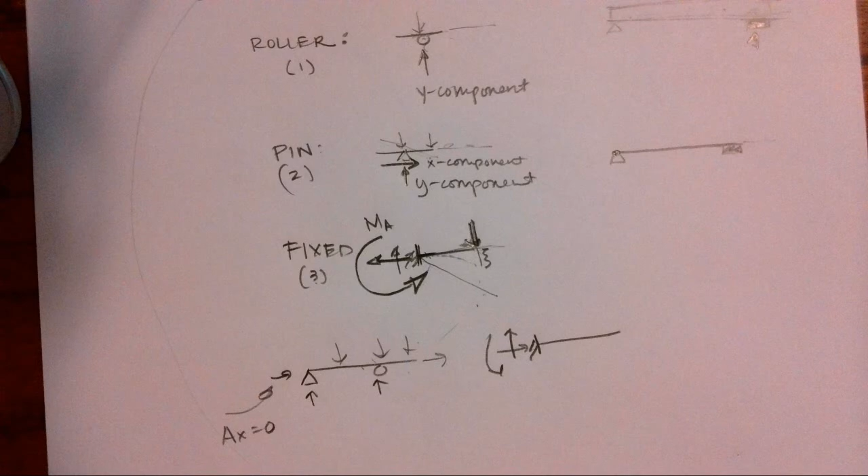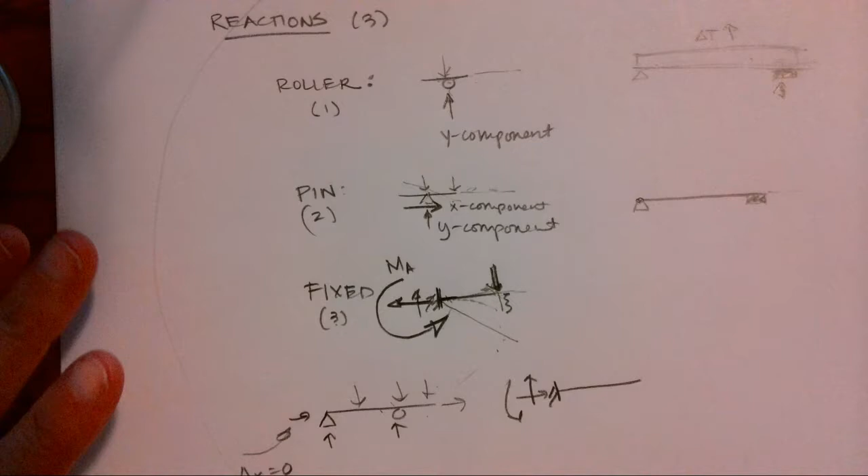We just covered the basic definition of our three reactions that we'll be working with in strengths: roller, pin, fixed. If you didn't watch that video and you don't remember any of this, I suggest you watch it. You have to understand this.

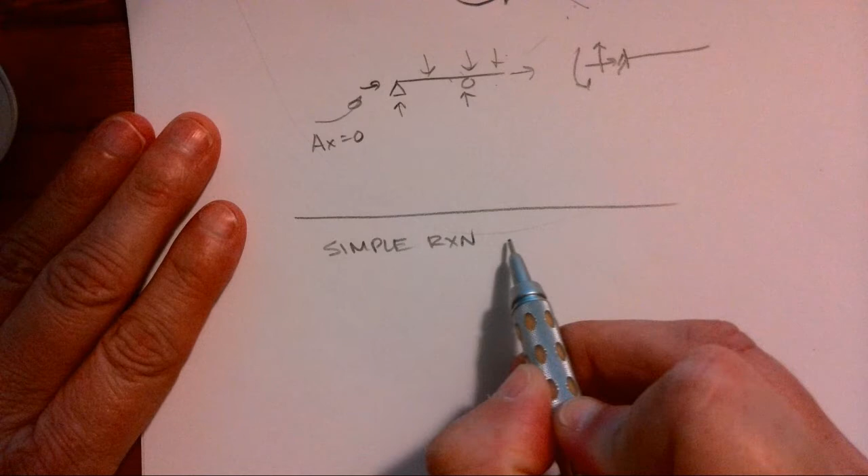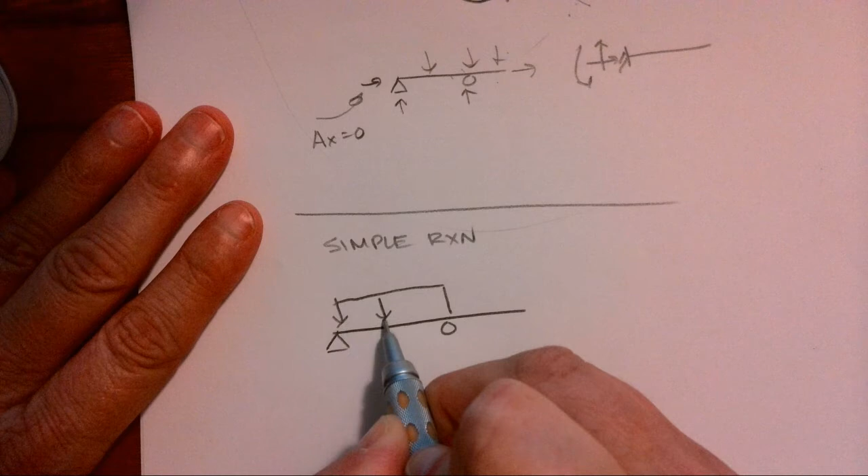So if we are going to look at a simple reaction from a simply supported beam or a simple cantilever, then let's just kind of make something up here and talk about the three types of loading. So we could have a uniform load, okay? And remember, it could also be linear, a function of x. We could have a point load, and we could have an applied moment, okay?

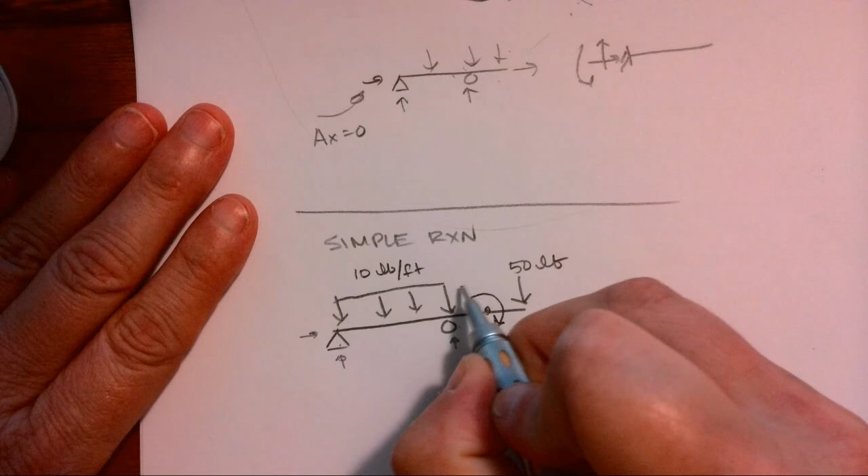So I have a pin and a roller. A pin, I could have, remember, an X and Y. We prevent translation. A roller, perpendicular. We're preventing translation. So let's just call this 10 pounds per foot. Let's call this 50 pounds. And let's call this 5 pound-feet. That's my moment that's applied.

And let's look at this. This is 10 feet. And this is 5 feet. Okay, so this might be what's given in the book. So the first step always is to draw a free body diagram.

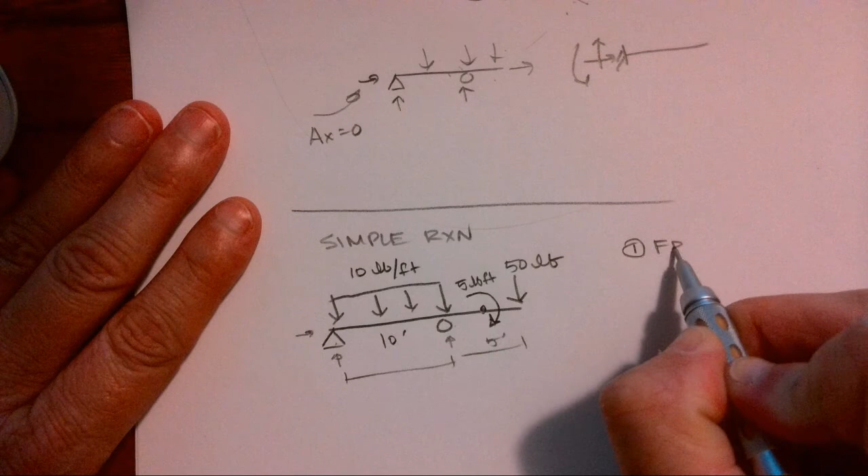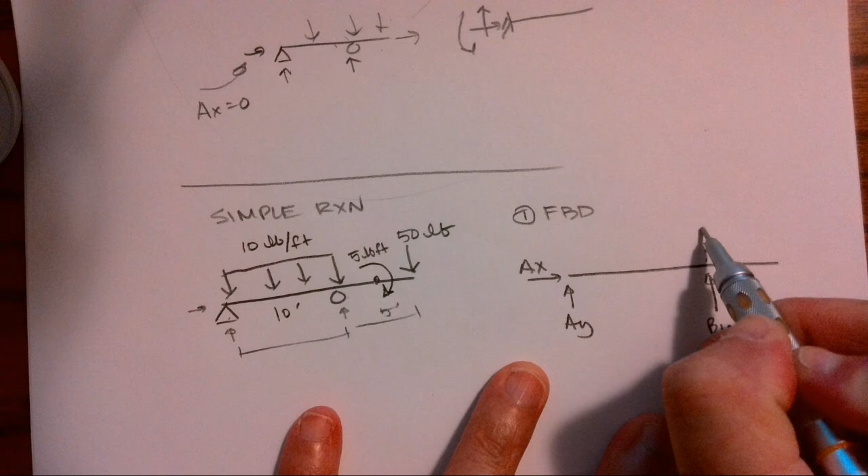So I'm going to draw a pin at A. I'm going to call this AY. I'm going to call this AX. I assume everything is positive, so up and to the right is positive. Then we might have BY. Okay, I'm going to go ahead and draw that rectangle of where that uniform load is sitting.

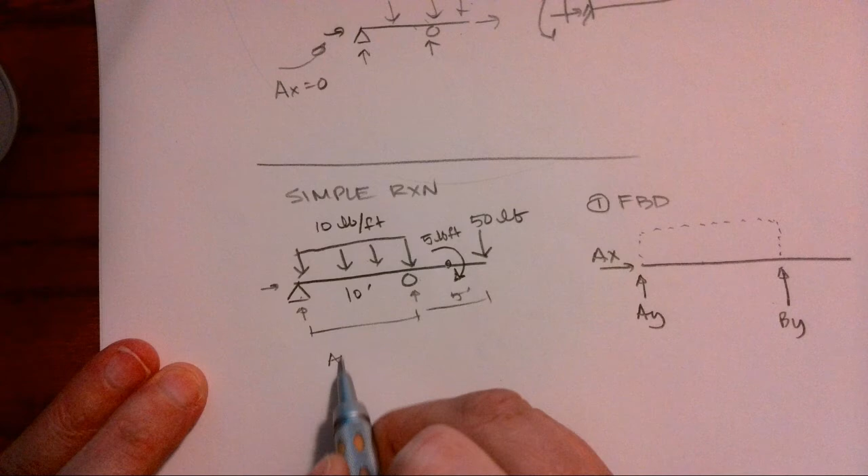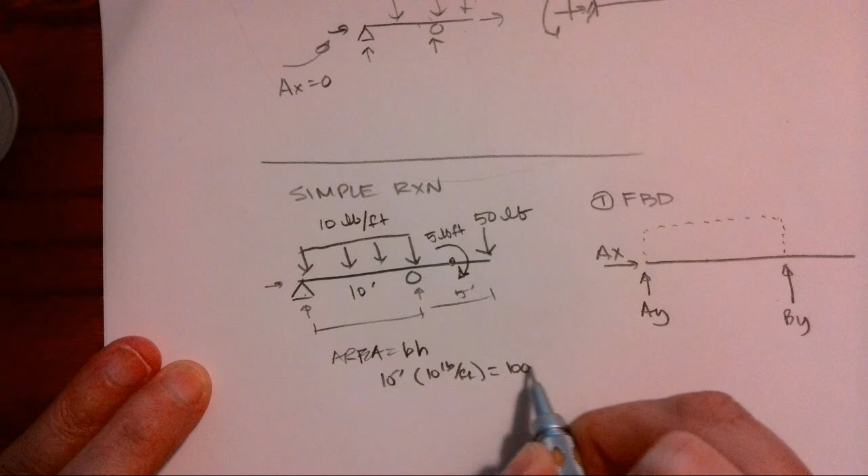And I know that we're just looking at the area under the curve. This is always the area under the curve. So that area is base times height because it is a rectangle. So I have 10 feet times 10 pounds per foot, and I get 100 pounds. So I've converted it from a pound per foot to a force load of 100 pounds.

And I know that the centroid of a rectangle is smack in the middle. So I have 100 pounds and I have 5 feet and 5 feet. Okay. And then over here, I have 50 pounds. It's also at 5 feet. And this moment over here, it doesn't really matter where it is because it's a moment. So we have 5 pound-feet for our moment.

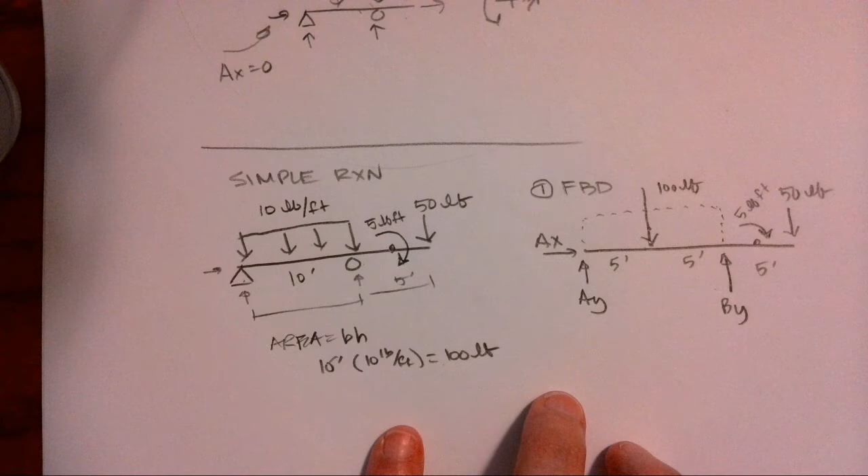Okay. So this would be an acceptable free body diagram. It has my unknown reactions. All of them that are possible are shown. It has simplified loads. It has all of the loads that are applied.

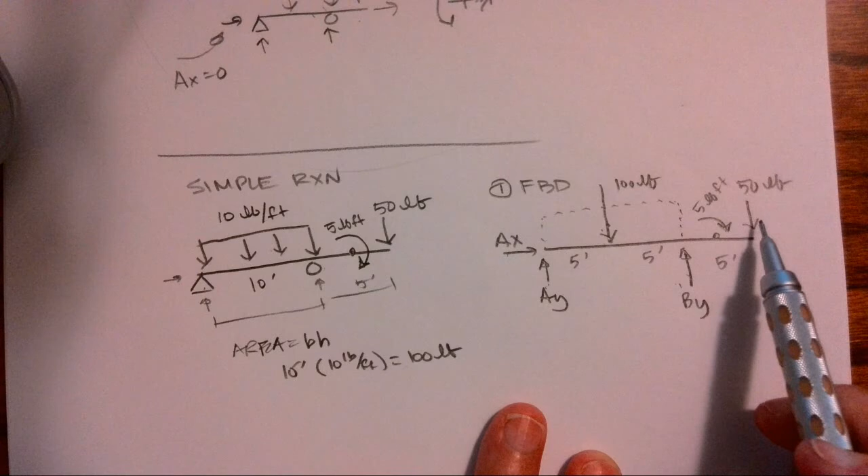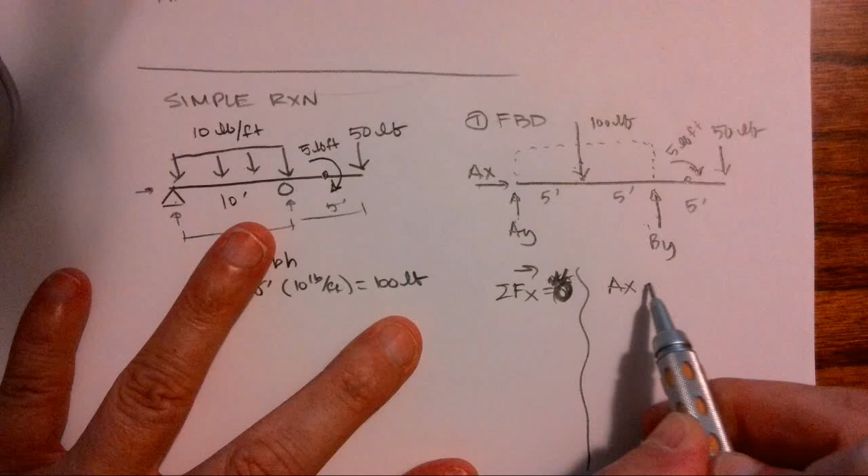So the first thing I'm going to do is sum forces in the x direction. And I know the sum of the forces equals 0 because we're in statics. Well, technically we're equaling mass times acceleration, but here in statics, our acceleration of the system is 0, hopefully. We're not looking at dynamic loading, so it's 0. So if I look in the x direction, I have AX. I don't have anything else, so AX must equal 0. So I can just box that in.

So remember, we're going to have summation. The sum of our forces equals 0. I'm specifically telling you it's in the x direction. I'm also telling you my sign convention, to the right is positive, and I know the sum of the forces equals 0. And so I have my rule on the left. Over here on the right is where I'm going to have my work. And I'm going to box my answer.

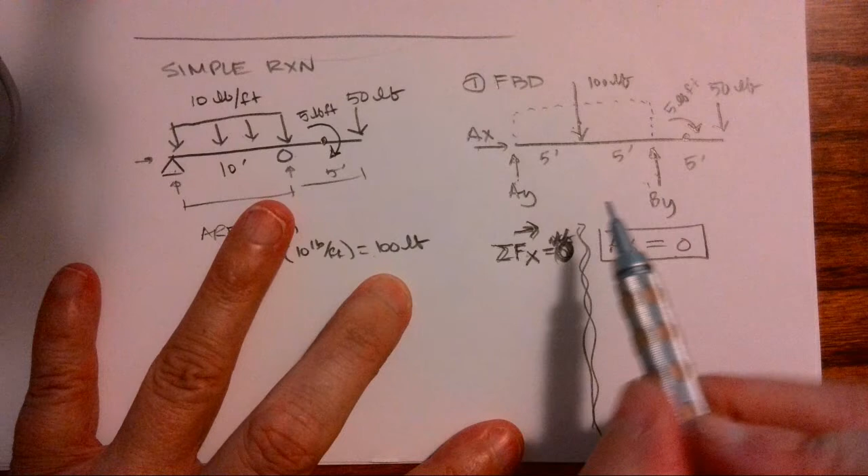Then, well, if I sum forces in the y direction, I will have 2 unknowns, and that is not very helpful. So let's do our sum of the moments, okay? And let's go about point A. And I'm going to call right-hand rule positive, equals 0. So again, my rule is I'm summing the moments specifically about point A, right-hand rule positive, it equals 0. So I'm going to stick my finger on A so I know where I'm going about.

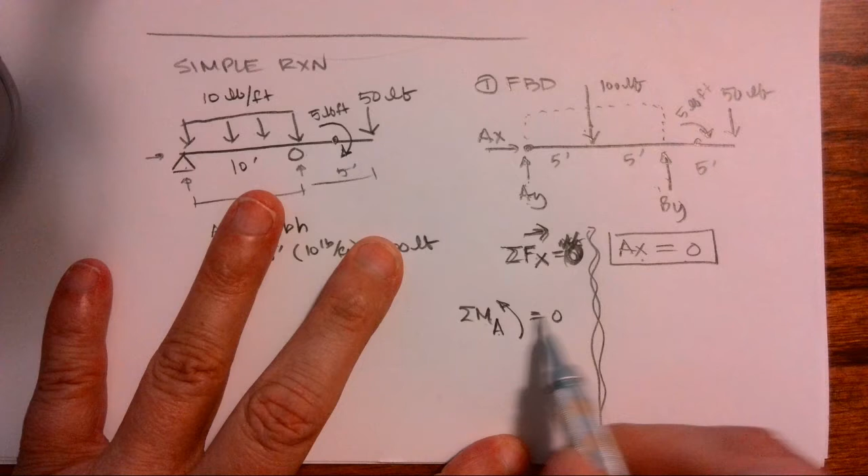It's also nice because I know that my reactions at A are a distance away of 0, so they will not be causing a moment at A. So I'm going to come across here. Okay, I have negative 100 pounds times 5 feet. So the units of a moment are pound-feet. It's a force times distance. Okay, then I have plus, that would be causing positive, By times 10 feet,

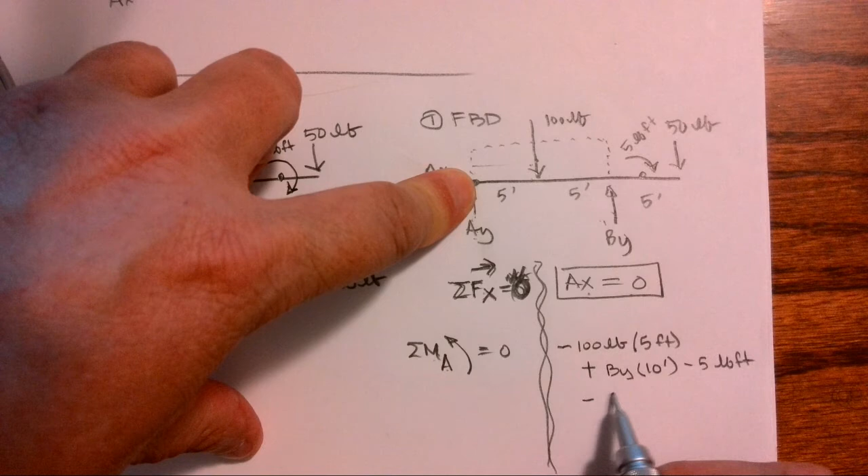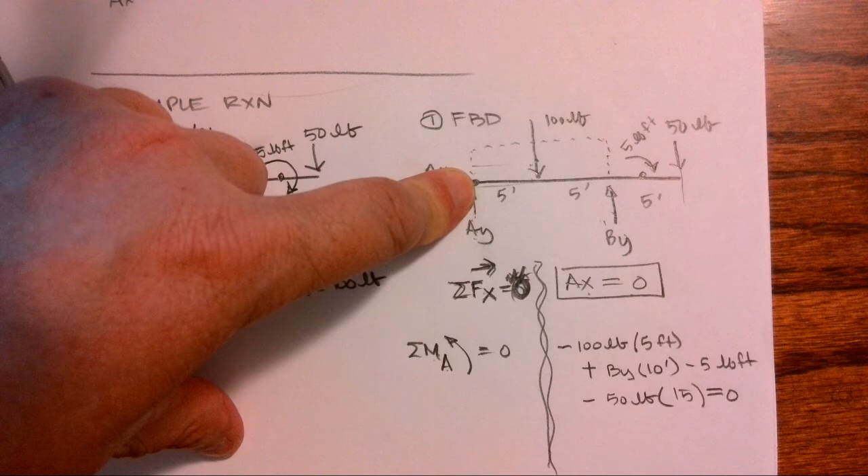okay, minus 5 pound-feet. We can see that's our applied moment. It's a negative rotation. Minus 50 pounds, and its vertical perpendicular distance is 5, 10 is 15 feet. I don't have anything else on here, and I know this mess has to equal 0. Okay, so I'm going to have 10 By equals

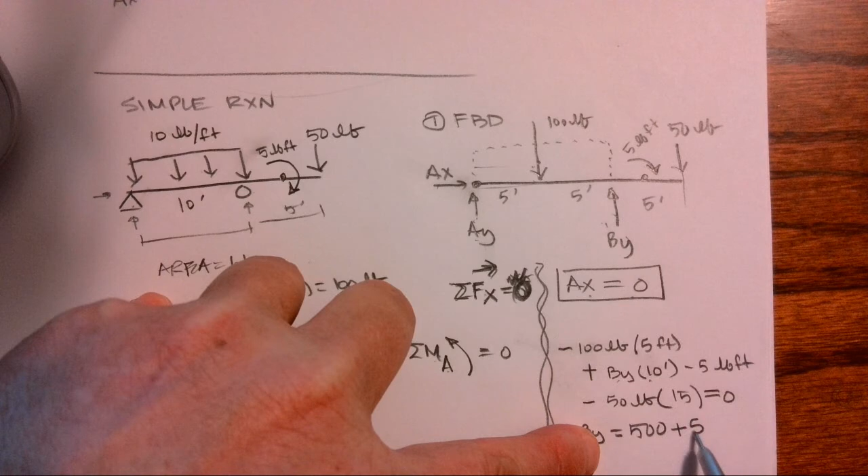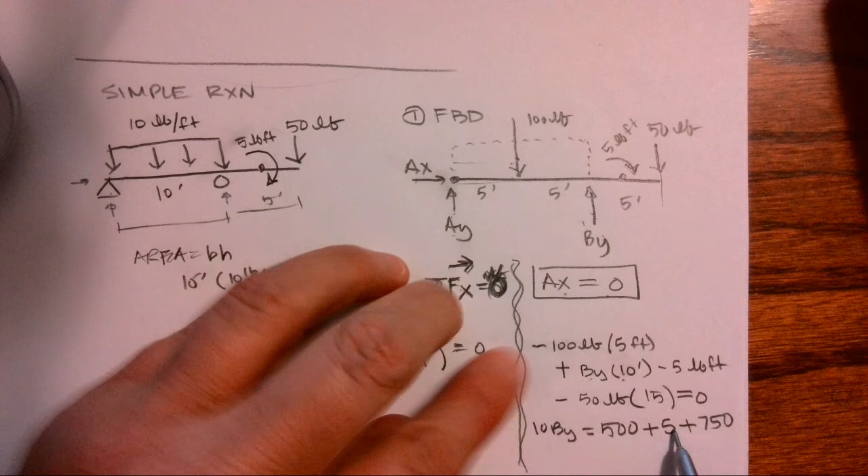500 pound-feet, okay, plus 5 pound-feet, plus, let's use the calculator because I sometimes do weird math in my head. 50 times 15 is 750. So the reason these are all positive now is because using the sign convention about A, negative rotation, positive rotation, negative rotation, negative rotation. When I use my algebra correctly and I keep By isolated and move everything else to the 0 side, they become positive.

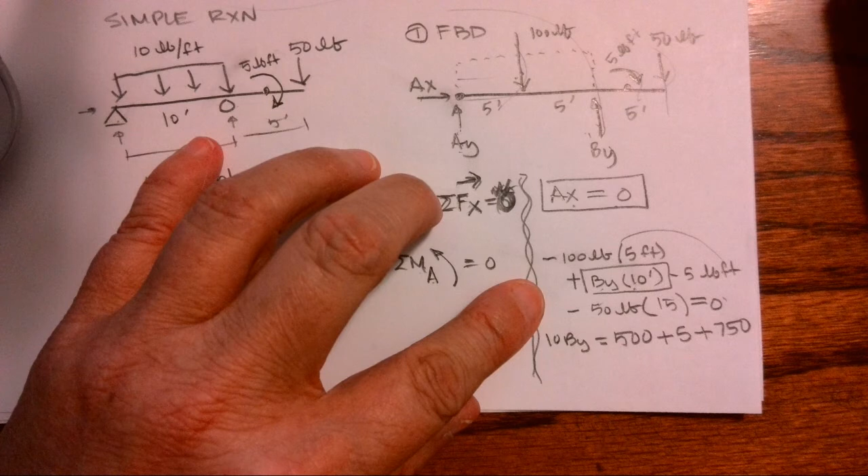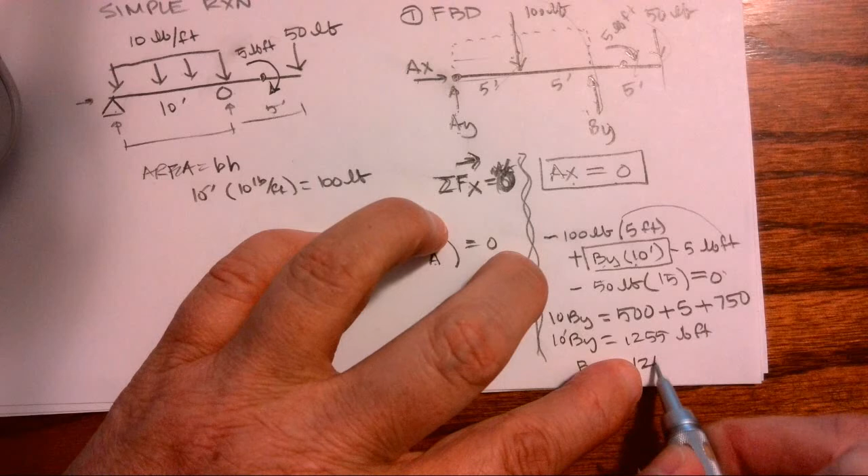So now I have that 10 By equals 750 plus 500 plus 5. So I get that equals 1255, and that's actually pound-feet. We're going to divide by 10 feet. So By equals 1255 divided by 10, and I get 125.5. Okay, it's a positive number. That tells me that my assumption of By going up is the correct direction.

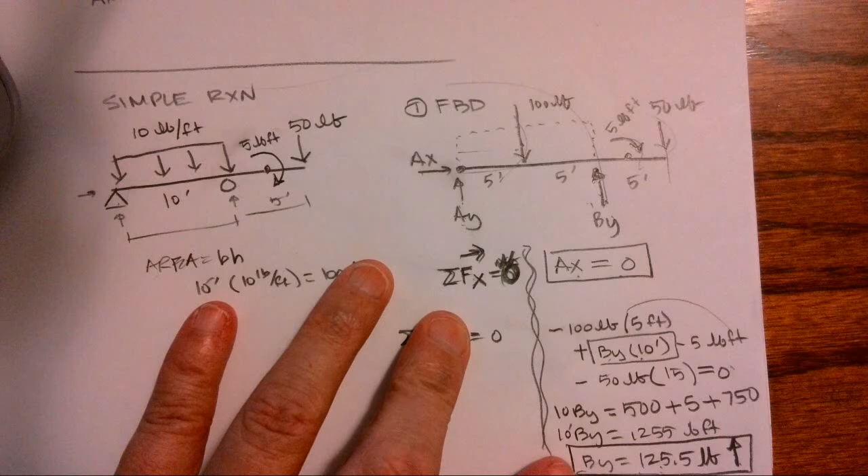Okay, I don't use a positive or negative with this. I do need to indicate the units, and I'm going to show direction. It is 125.5 pounds going up. Okay, when you give us an answer for a reaction, it needs to include the magnitude, the unit, and the direction. Because it came out positive, I know it's actually going up. Had I gotten a negative value, then I would have said 125.5 pounds, and I would have shown it going down.

Okay, so now that we have By, I can come back over here and I can sum forces in the y direction again. They have to equal 0. So again, I'm summing forces. This is my rule. I'm summing specifically the y component forces. My sign convention is up as positive. The sum of the forces equals 0. Okay, so here's my rule. Over here and over here, I'm going to show my work and I'm going to set it up identical. Okay, so I'm going to go left to right.

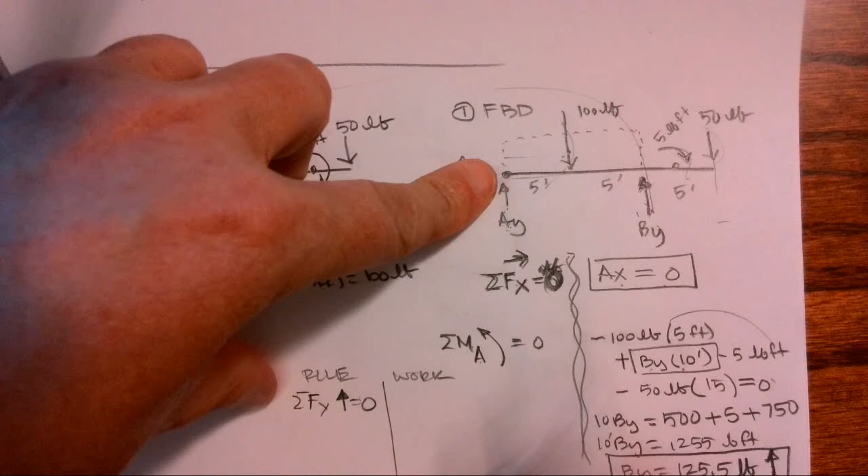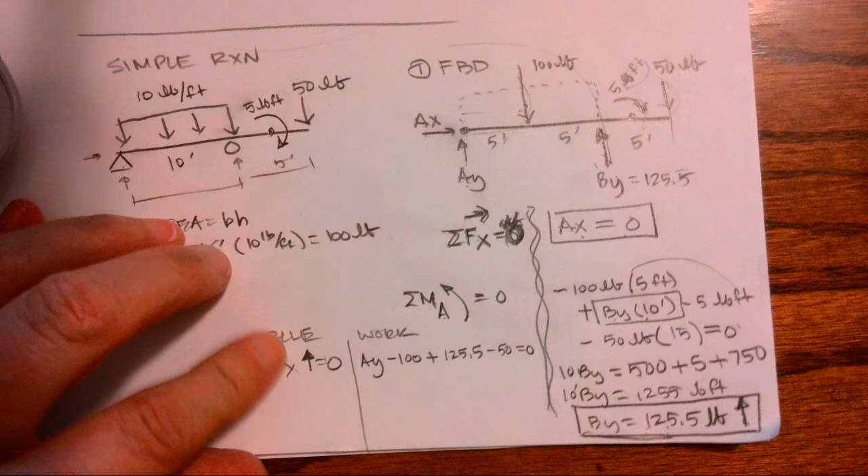So I have Ay minus 100 plus 125.5, because I now know that this is 125.5. The moment does not affect a y component. It's a moment. Its units are pound-feet. The units over here are just going to be pounds. So then minus 50, and all of that has to equal 0. Okay? Please, please, please, all of the forces equals 0.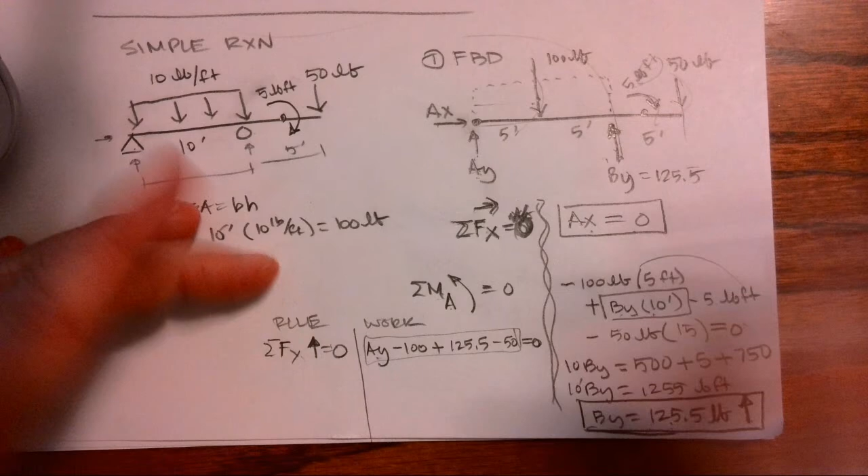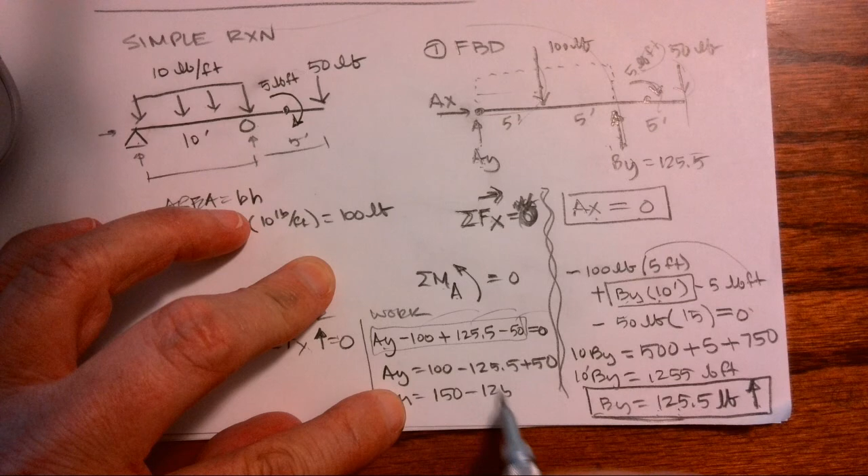Otherwise, you may end up screwing up your sign convention if you try to just say Ay equals and do it without looking. So I have Ay equals 100 minus 125.5 plus 50. Okay, so I move that over, that over, that over. So Ay equals 150 minus 125.5. So I get that Ay is 24.5 pounds. I got a positive value, so it's in the direction I assumed. Ay equals 24.5 pounds going up.

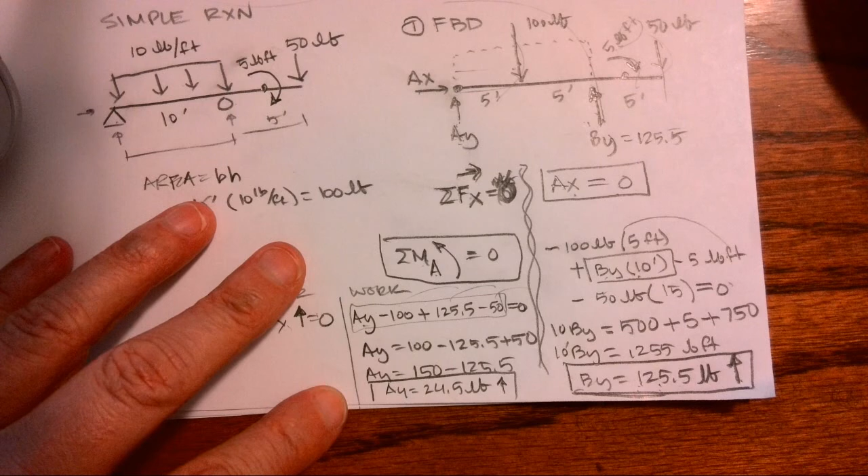Okay, so the next one I will do will be a fixed end, where we have to also solve for that moment. Okay, when I have a pin and a roller, I can use the rule of finding the sum of my moments about a point equals 0. I do not show a moment on here because a pin and a roller cannot resist the rotation. Again, a pin is like a teeter-totter. If I sit on it, it's going to rotate.

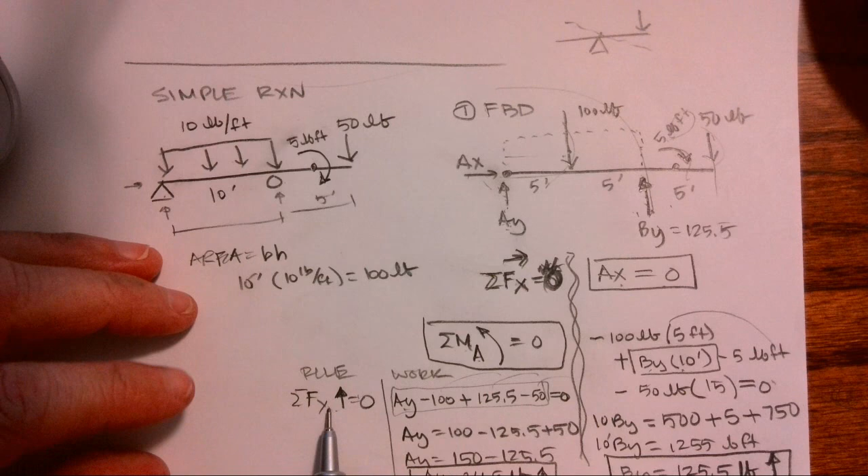So this up here is the reactions that can actually happen. This down here are my 3 rules: summing forces X, summing moments about a point, and summing forces Y. Summing moments doesn't mean that a moment is occurring at that point. It's just the rule that we use for equilibrium.